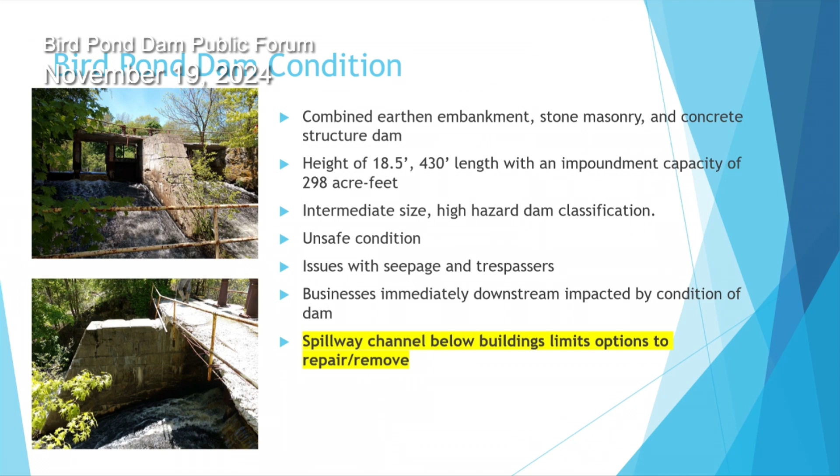hazard. Okay. So this is a summary of work we've done to date. Like I mentioned, between 2019 and 2020, we did a bunch of evaluations at the dam site. We collected geotechnical information, sediment information, structural inspections, and we compiled all of that into a phase 2 report. And that report did recommend repairing the dam because of the concerns of the businesses that are downslope. I already mentioned some of the seepage concerns and the public safety concerns.

So then in 2021, we did more detailed evaluation of what would need to be done to repair the dam. We looked at a few options. We determined that if the dam were to stay in place as it is now, the spillway would have to be repaired. There would have to be armoring at the top of the dam because during a very large storm event, based on what we had evaluated, there would be water going over the top of the dam, so the dam would have to be stable. And then we did some additional sediment characterization in 2022.

And then in 2023, we started down a pathway of doing some more detailed hydraulic and hydrologic investigation of what's going on at the dam, because we knew that the businesses that are downstream really present a challenge with how we're going to rehabilitate this dam. So we looked at a whole bunch of different options that I'll talk about a little bit.

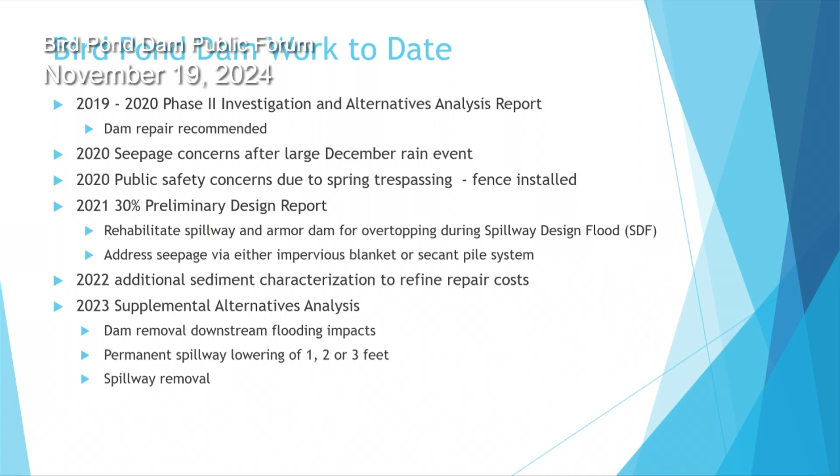We did look at potentially basically removing the dam. We looked at lowering that spillway. So right now, that spillway that I showed you on that last slide, that waterfall, really maintains the water level in Bird Pond. That's really what makes Bird Pond a pond and not a river. So we looked at perhaps lowering that at various increments, and then we also looked at totally removing that spillway.

So again, this slide pretty much says the same thing. These are all the alternatives we looked at, and then for each of these alternatives, we used the U.S. Bureau of Reclamation identification of hazards methodology to look at risk for flooding and danger to people downstream of the dam under a whole bunch of different scenarios, and I'm not going to show you all of them, but I am going to show you a few.

So this methodology looks at not just flooding depth, but also velocity, because there's a difference between still water and fast flowing water in terms of risk. Like I said, it looks at the risk to pedestrians, and it basically characterizes this risk into either low risk, a high danger consideration, or something in between, which is called a judgment zone.

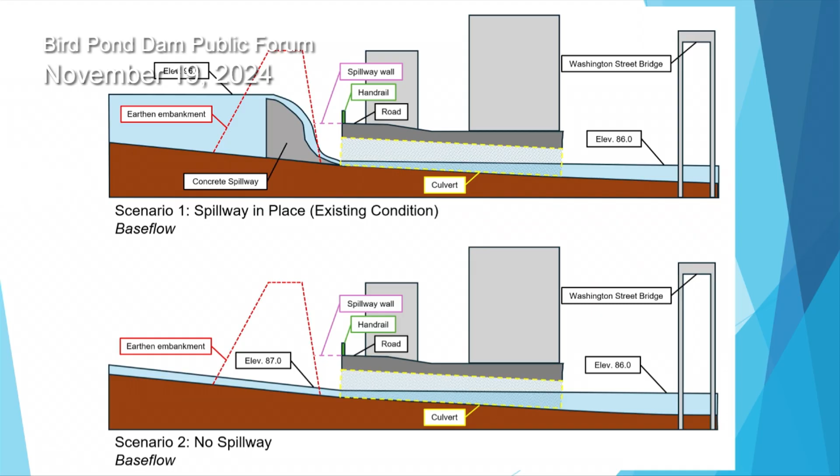So right now, here's the pond level, elevation 96. Water is flowing over all the time, over the spillway, through the culvert. Under base flows, there's no flooding, everything's okay. If the spillway were to be removed, so here's our spillway, it's no longer here. So the water level in the pond is no longer up here, it has decreased to elevation 87. And I have some renderings we'll show in a minute too. So the biggest difference, and it is a big difference, there's not a pond, there's just a river.

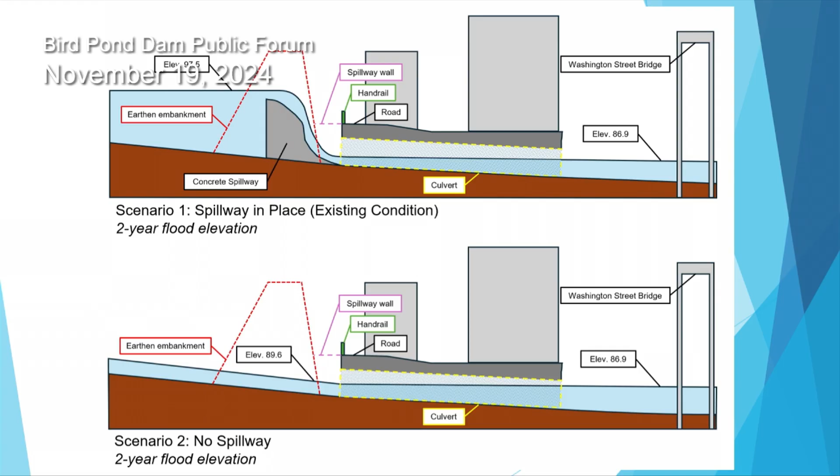So here's the existing condition. Right now, during a 500-year storm, water goes up over the top of the dam. There's flooding here in the road on the upstream side of the buildings, and that is because there's water coming over the top of the dam. But there's also water backing up here at the Washington Street Bridge.

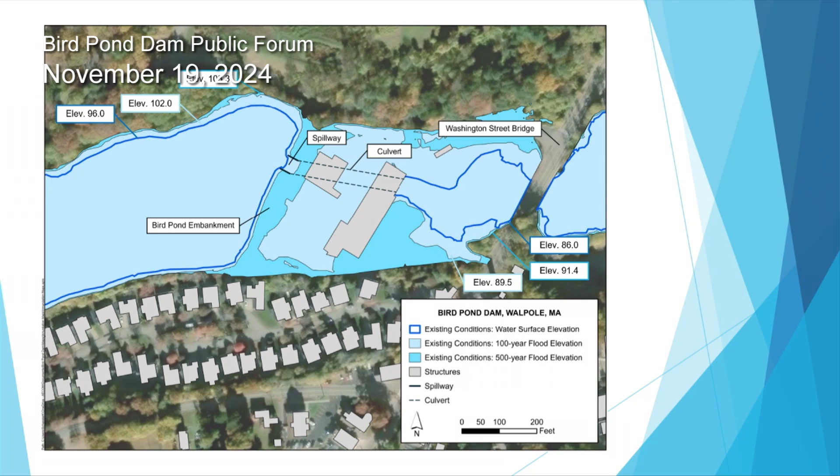These numbers, the next slide I'm going to show you is the scenario with the spillway removed, and these numbers don't change. The numbers upstream of the dam will change, but downstream they won't. 86, 91.4, and 89.5, they're the same. So under the scenario with the spillway removed, nothing downstream is going to change during any storm events. It's going to be exactly the same as it is now.

Upstream, it will change. The normal water level will be lower. The 100-year floodplain elevation will be lower, and the 500-year flood will be lower.

So these are some of the conclusions that we drew after going through this very extensive analysis. Again, the culvert does convey flow underneath those occupied buildings, and that is a challenge of how to deal with that. The area does have a very large watershed, 25.4 square miles. There's a lot of water coming down here, which is also a challenge. The development immediately downstream. Again, the Washington Street Bridge is serving to back up water during storm events.

And so our major conclusion was that the spillway removal does appear to offer some more flood risk benefits compared to all the other alternatives that we looked at. So the next few slides are going to show some information about the spillway removal concept. And again, this is just to help explain and understand what this concept would look like. Again, we're here tonight to solicit input, and no decisions have been made or will be made tonight.

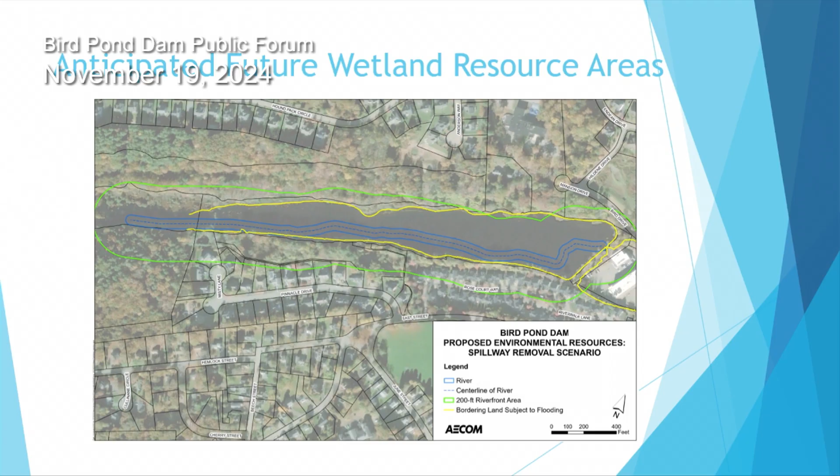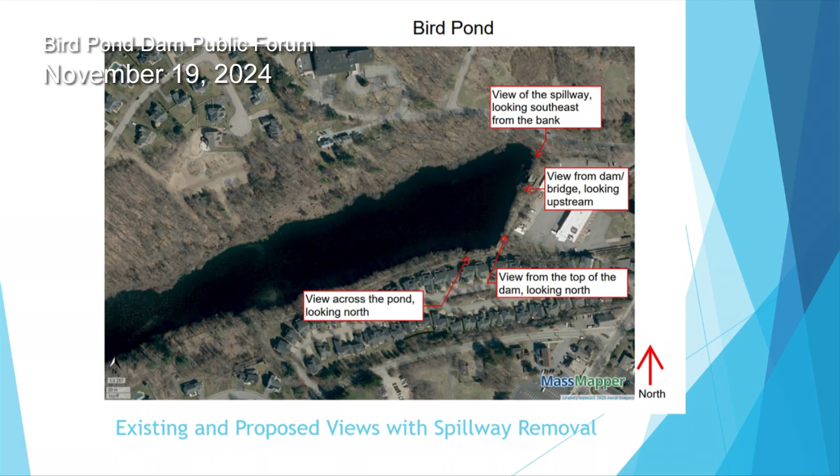Again, in September, we had a lot of questions about what is a dry dam, because that's really what we would refer to the spillway removal alternative as. It would really be operating a dry dam. This really shows you what the dry dam is. There's not water there except for the river. Most of the area upstream of the dam is dry. So that's really what we mean when we say dry dam. There is a river, but there's not water outside of the river during non-storm events.

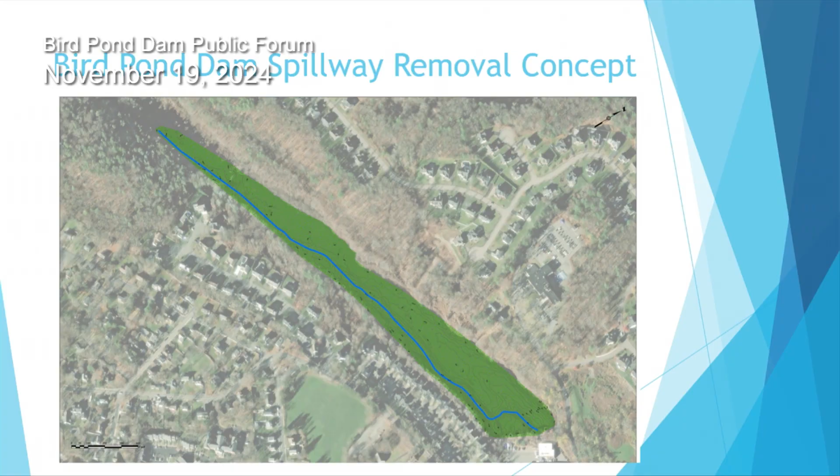There is. So I'm looking at, on that slide, I'm sorry, I'm not trying to interrupt you, I'm looking at the Riverwalk condominiums, those 2 rows of apartments, condos down there. So really, your sketch here starts there. It's just west of that point. So is that really where you expect to see changes in the river flow? So here, the changes in the river would start right here at the dam and go at least up here. Sure. And beyond? Or I guess that's my question.

I can't say whether they would go beyond, but are these the condominiums? Yeah, those are the condominiums. So in this area. The bottom is, and then that's Pinnacle up above it. Pinnacle's up top there, yeah. Yeah, okay. Certainly in this area, it would be a river and not a pond. Okay, and the river seems like it's tending toward the Pinnacle neighborhood, south. Yeah, south.

Anyone else? Okay, so at this point, I'm going to bring us to what we're really here for, which is to get feedback and input from the folks in the room here. So what I'd ask you to do is, one at a time, just give your name, your address, and then briefly your point. And please stay focused on the Bird Pond Dam area itself, what we've been talking about, so that we can keep the conversation going. Subsequent speakers, please pay attention to what's being said ahead of you so we don't get into a whole lot of repetition if we can avoid that. So who would like to go first? Please, step right up.

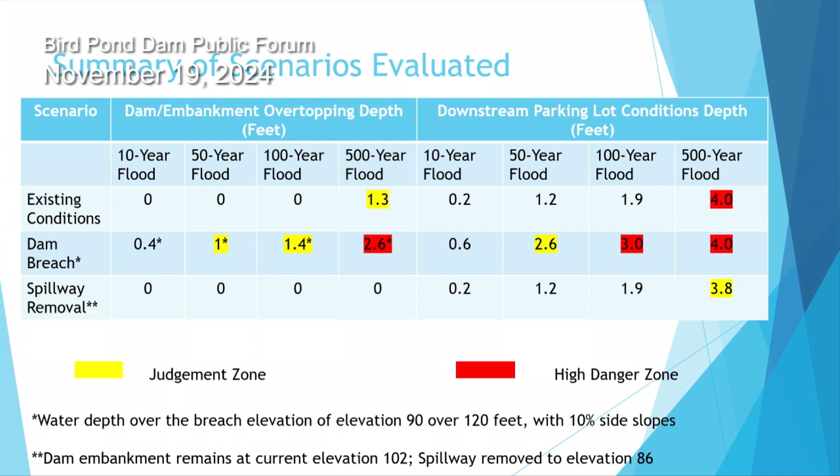What this slide is going to show is that there is a high degree of risk in the dam repair. And the dam repair is actually the existing conditions. They don't call it that, but when you repair the dam as it currently stands, everything will be the same. So it is today and tomorrow repaired.

If you go to the far right, you can see the 500-year flood where you've got the overtopping of 4 feet and creating a lot of fast-moving water down through that second parking lot area that they talked about in terms of, if someone was standing there, or if there's cars there, those things are likely to get washed away because of the depth and the speed of the water.

So if the town owns the dam after repairing it, we take on that liability. So that is something we would have to think very hard about. It's one of the big factors that the board is going to have to consider. And what we need to be then asking ourselves is, that's the current day view. Whenever that flood were to occur, you never know when the 500-year flood's going to happen. It could happen tomorrow.

Forecast suggests otherwise, but you get my point. What is going to happen is somewhere down the road, there is going to be one of those floods. The water's going to go up and overtop the dam. And even in the repair of the dam scenario, we still have that. So that's a risk that the town would be taking on.

So that's one. Number two is the long-term cost of maintaining the dam. Break that into two pieces. You've got the day in, day out maintenance of the dam, which largely comes down to things like mowing to make sure that those trees that would grow up don't get into the earthen dam and start to erode it, keep the grasses down, all that kind of stuff.

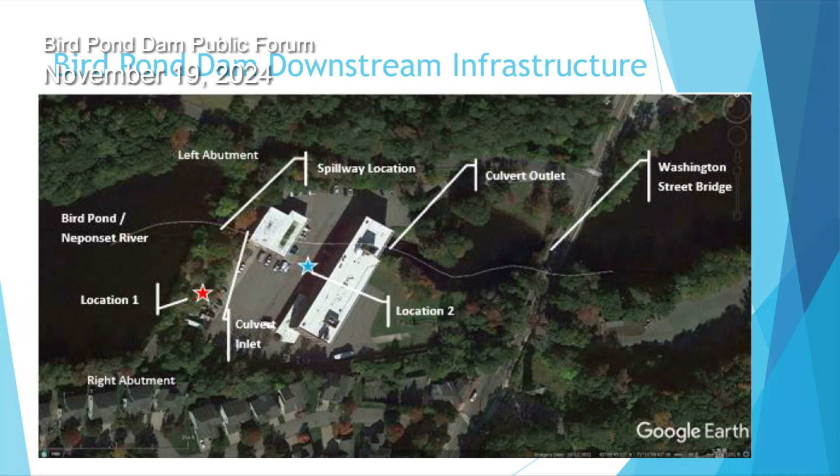Okay. If you raise the height of the earthen dam, as I just described, the problem is when you get out here, the water will go around the dam at some point, and it will flood into this area here, and perhaps on the other side. And the other thing was, we talked about $4 million to repair the dam, but that doesn't get rid of that red box on the far right. We don't have a number for this, but it is safe to say it is many millions of dollars more to increase the height of that dam and deal with all the flow-around issues and so forth.

So we've pressed on that issue pretty hard and said, is there a way to get that red box to turn something other than red? And can it be done for some reasonable cost? And it's quite a bit more than the $4 million. That's safe to say, correct? Okay. You've already spoken, so let me see if there's anybody else who'd like to speak. Sure.

My name is Ethan Pollock. I live at 11 Rose Court Way in East Walpole in the Riverwalk development. No matter what path the board decides to go on this one, the town is going to have to take ownership, whether it's a repair or a replacement. So you're going to own the liability no matter which way you go. So the liability, I see, is not a legitimate concern. I say that as a taxpayer. I'm willing to take the hit, one way or the other. But the liability is going to be there for the town.

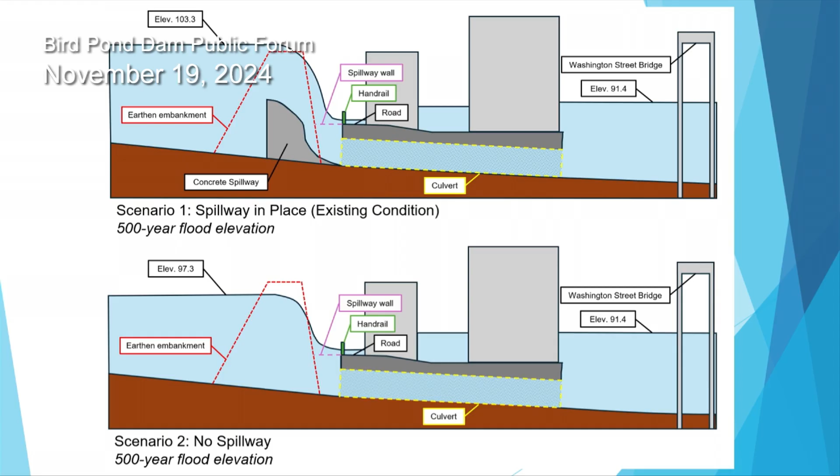Just something to think about, and I'm sure we're gonna have some conversations about this. I haven't spoken directly to you for a while, I haven't seen any blueprints like this, but it's a concern of mine, and I know the ills of flood insurance. You pay a lot in and get very little out if anything happens. So I'm really glad you're here, because we have been looking at your buildings and your parking lot and the culvert and all this stuff. And one of the questions we've been asking is, what are the impacts into that area? And are the people who own that building, you, aware of what we're doing here and understanding what it all means? So I'm glad you're here.

This process is going to continue, and what I want to do is make sure we keep you directly in the discussion. We have to first decide what we're going to do. And then as the designs, whichever way we go, start to come together, make sure that we're all clear on what that means to the parking lot, to the buildings, and so forth. So again, I'm really glad you're here tonight. And I'm concerned about my building, and my parking lots are obviously the staging point for a lot of the construction. And what's gonna happen to my property after they're done?

I think these are all very good questions, and we're not far enough down the path to make a choice, but we will be there, and so, yeah, we absolutely need your input on that. Right, I agree. Okay, feel free to talk to me anytime. Great, thank you. Really appreciate you being here tonight. Thanks. Okay, who'd like to go next?